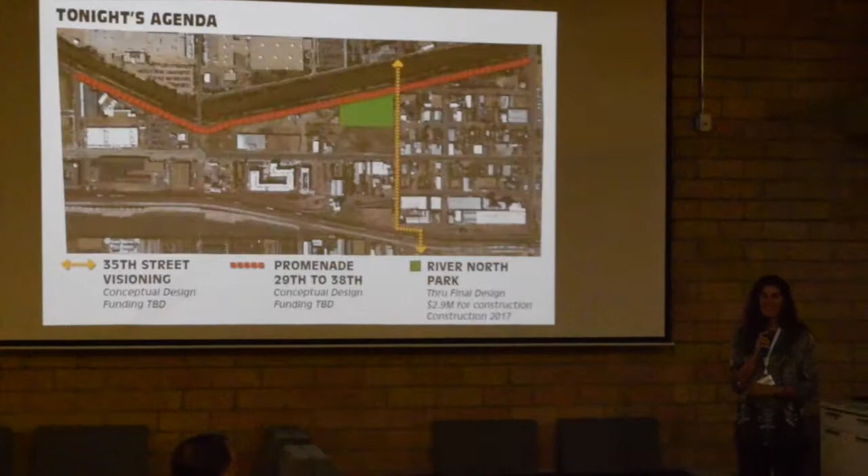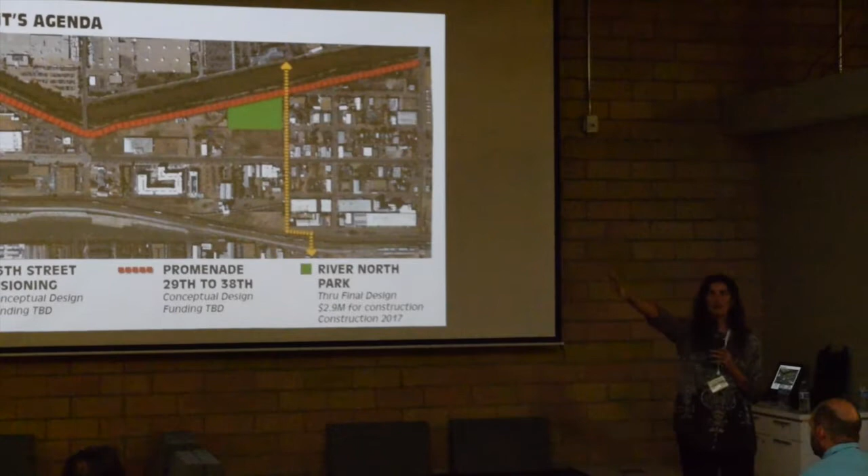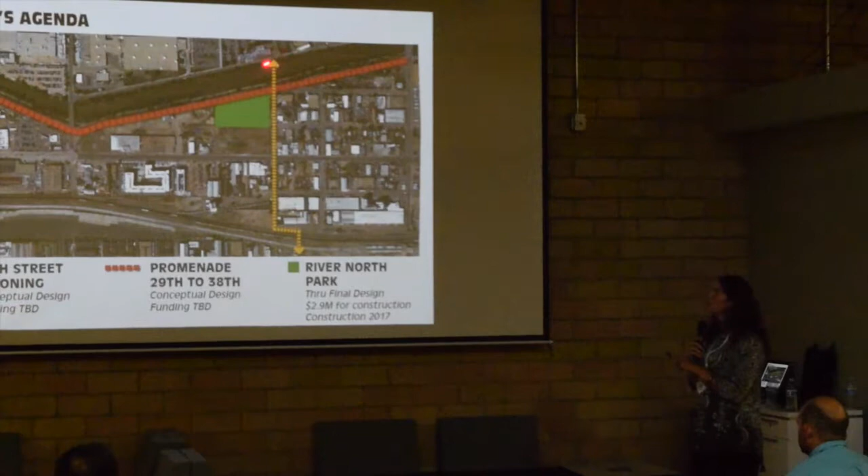So we're going to talk about 3 projects tonight, and I'm just going to orient you, then pass it over to Greg to talk about the first one. 35th Street Visioning is in conceptual design right now, and they're in the room over here. If you didn't get a chance to go in, they're looking at streetscape alternatives from the future bridge going over RTD to the future bridge that'll go over the South Platte River, plus parking alternatives and a promenade along 35th Street. They have a lot of ideas, so go check out what they're doing over there.

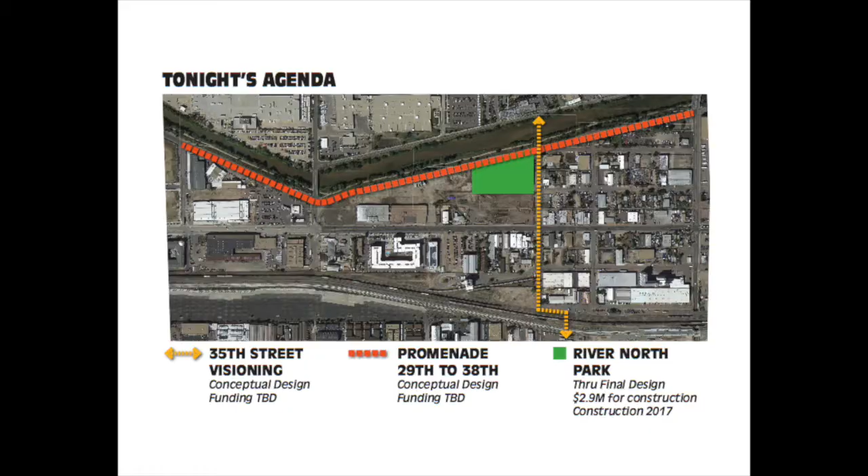The promenade is another project we'll be talking about tonight. It's in conceptual design, running from 29th to 38th along Arkins Court. Right now that's a vehicle street. In the future it'll remain a vehicle street from 29th to 32nd, and then be repurposed to a pedestrian promenade from 32nd to 38th. Greg's going to talk about that in just a second.

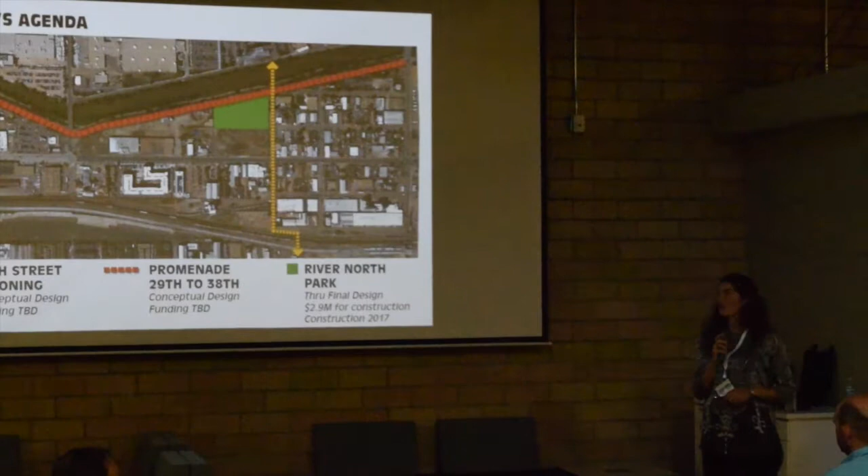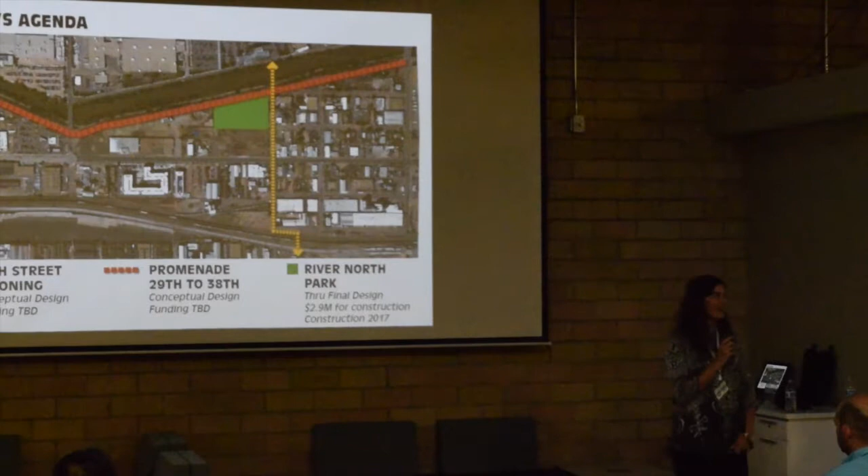And then we'll wrap it up with talking about River North Park. The promenade concepts have been over here, and the River North Park concepts are on the other side of the room. I'll walk through the big ideas for the park concepts. That one has funding through construction, $2.9 million to get something built out there, so that's pretty exciting. I'll let Greg start off with the promenade.

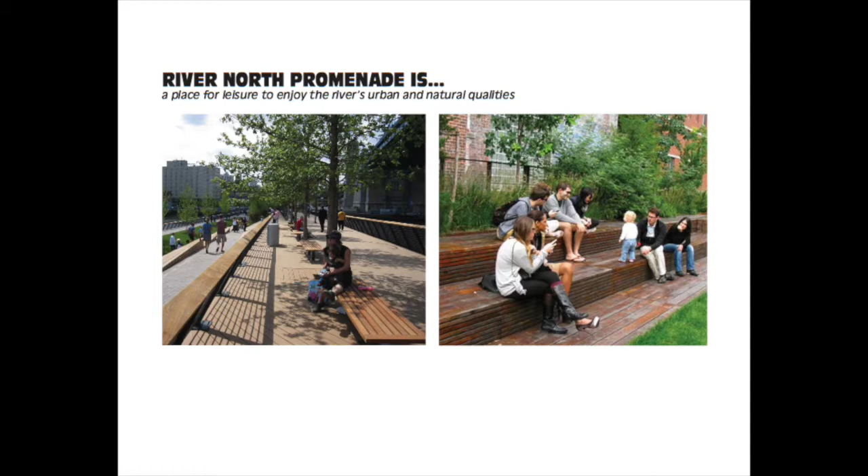Okay, thank you. I wanted to start by talking a little about how we've been thinking about what the promenade is. You've told us how to think about it through the first public meeting, through stakeholder interviews, and being out in the community. The promenade is a place for families. It's a place for kids to ride safely. It's a place for all ages, for people to stroll, a leisure place, a place to meet your neighbor, overlook the river, and really hang out. Finally, a place on the Platte River where you can actually eat, dine, and have a drink overlooking the promenade and the river.

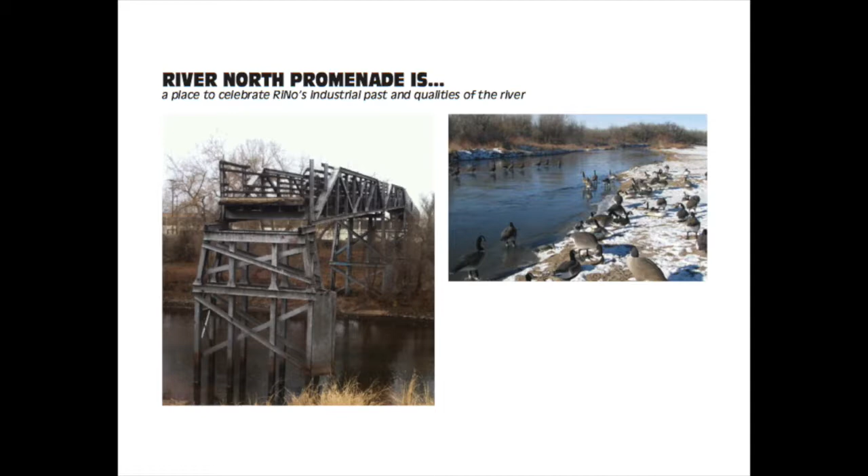It's also a place we've heard strongly from you should celebrate RiNo's industrial past, as well as the seasons and natural qualities of the river, like the tens of thousands of geese that flock here in the winter.

And lastly, it is a regional destination, and it's really to celebrate RiNo's art and culture. So, as Nicole mentioned, the scope area is from 29th to 38th.

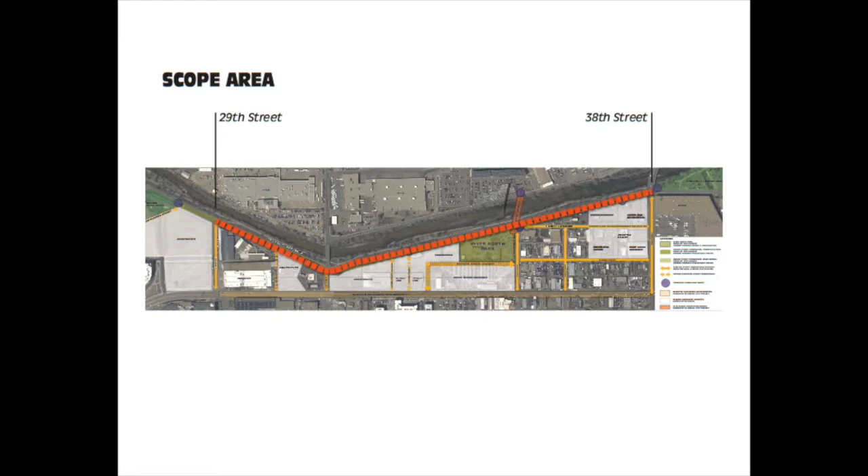The repurposing of Arkins. Next slide. So this diagram shows you connectivity and river access. And what you're seeing in yellow are

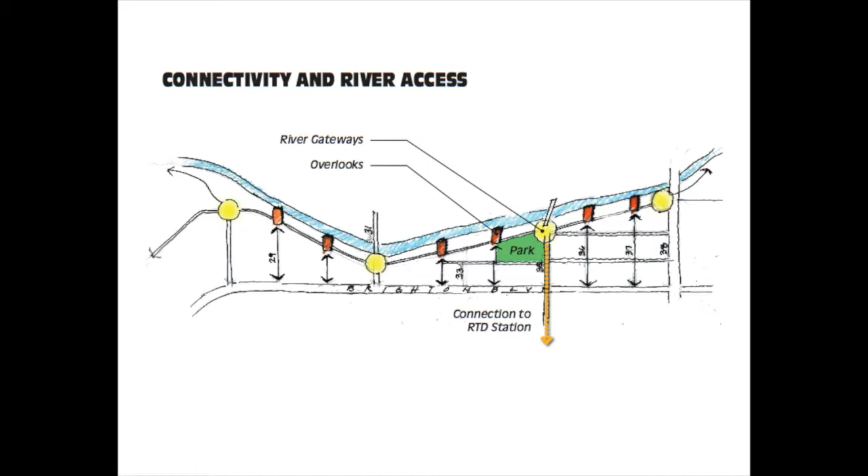connection nodes, if you will, where, as you know, RiNo is somewhat landlocked between the rails. These nodes are where RiNo has a broader reach. It's less than a mile both to Union Station into the Central Platte Valley from 28th, close proximity to Globeville Landing and Globeville National Western Stock Show, and 35th is an important node, as Nicole talked about, the 35th Promenade,

connecting to RTD, the greater region, as well as Curtis Park, Cole, Whittier neighborhoods. So there's good connection. 31st is a portal and gateway. There's talk of another future bridge that might potentially go over the tracks there. So that is how RiNo, or the promenade, is connected to the region.

But it's also connected locally within the neighborhood through the numbered streets. And even where there are not public streets going through, the developments in the area are making public access ways that will connect strongly from the neighborhood to the river.

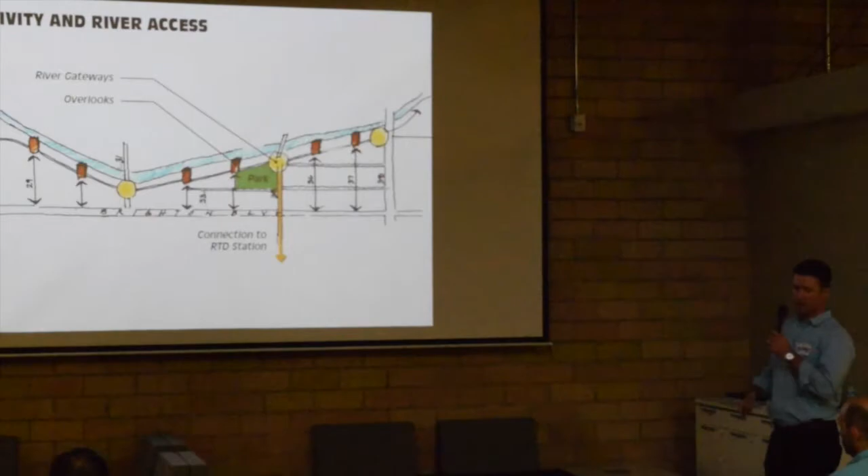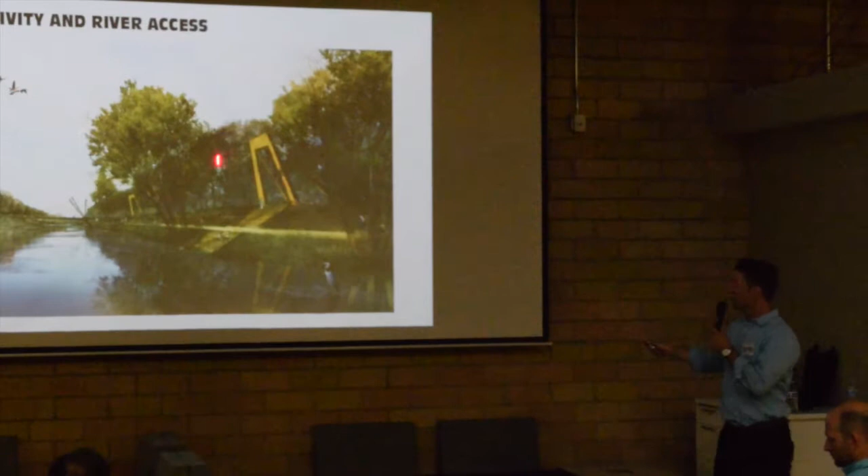So at each one of these nodes, next slide, we're planning these, this is a concept for these visual gateways to the river. So when you're on Brighton Boulevard and you're looking down the hill toward the river, you're going to see these. When you're on the river in a canoe or you're on the path, you see these up along, connecting the river path with the river promenade.

At our last meeting, there were a lot of concerns about vagrancy and homelessness and crime and other things along the river. So these are not only visual gateways, but they're ways to get eyes both on the river and the river path, as well as to connect those between the path and the promenade.

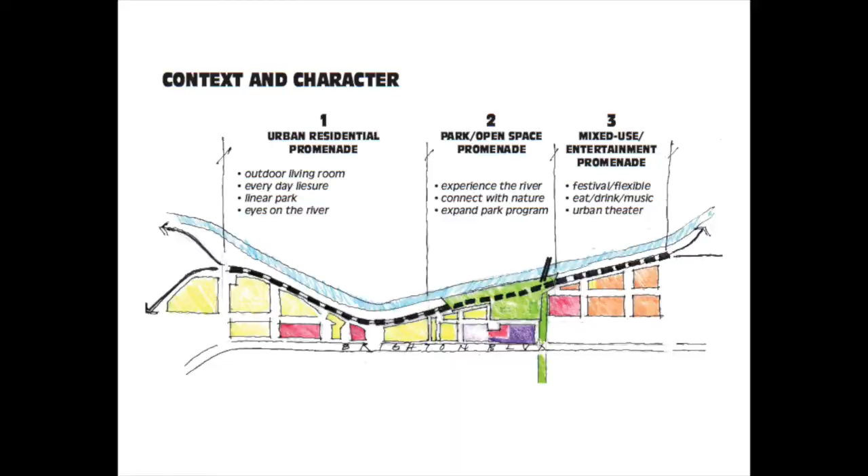Next slide. Also guiding our thinking is just the context. The changes that are happening in this neighborhood are rapid. Almost every property along Arkins is in the city now with redevelopment plans. So we're guided by what is the adjacent context to the promenade.

In this first reach, from roughly 28th to 32nd, there's a lot of residential development being proposed. So we see this as could be more of that outdoor residential living room for people. The park and open space promenade will benefit a lot from what we're talking about with River North Park and expanding park programs to the promenade.

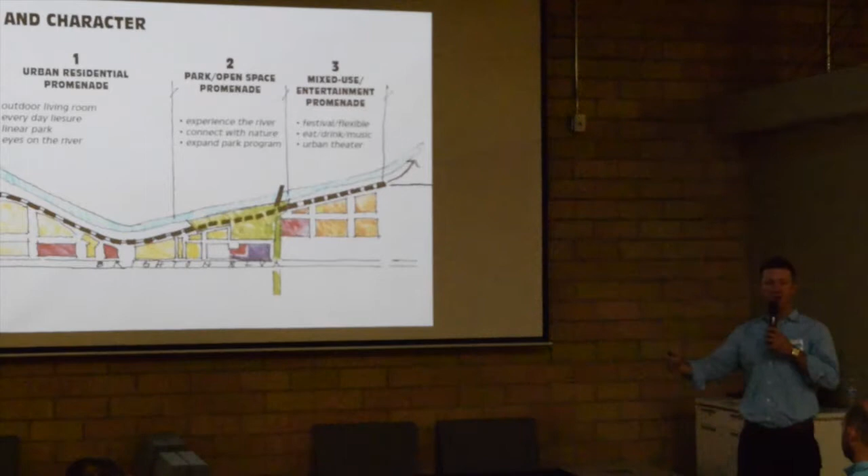And then the third reach, there's a lot of planning for both residential but a lot of mixed use and entertainment district in this area. So we feel like this character, or these uses, can really spill out onto the promenade and strengthen the relationship between the promenade and redevelopment.

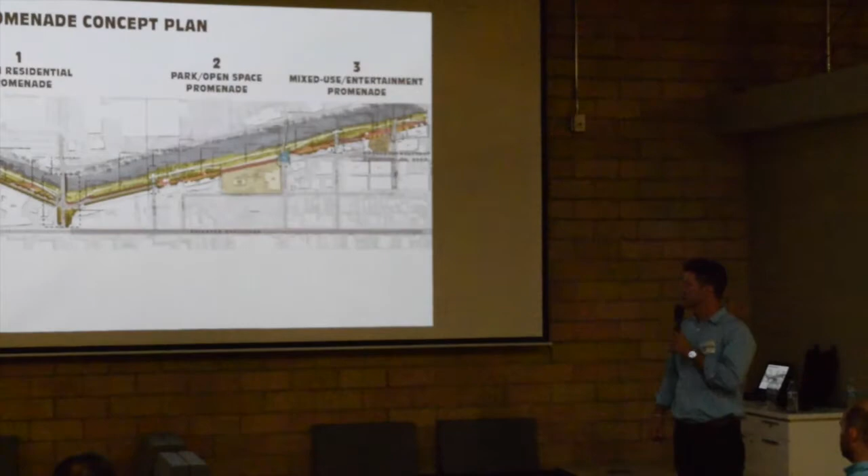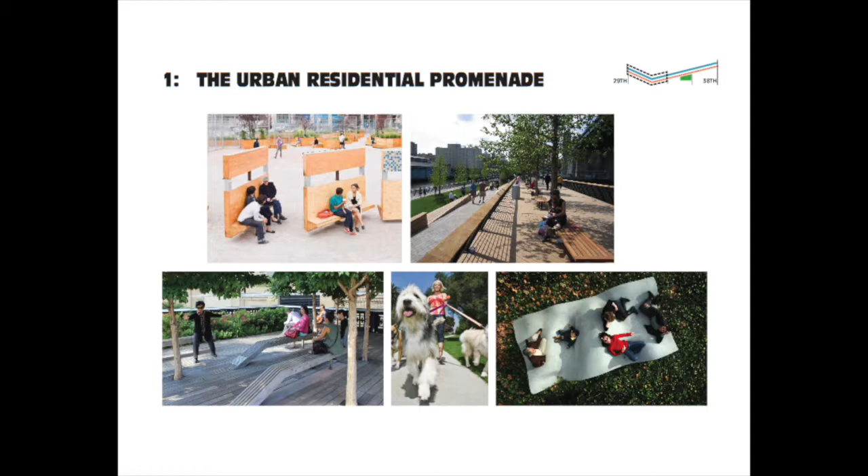Next slide. So this is the plan that you've seen over here. I'll just walk you through these three various areas, step by step. First, the urban residential promenade - this is the place where you meet your neighbors, you look out over the river, you relax, you walk your dog, you really just hang out.

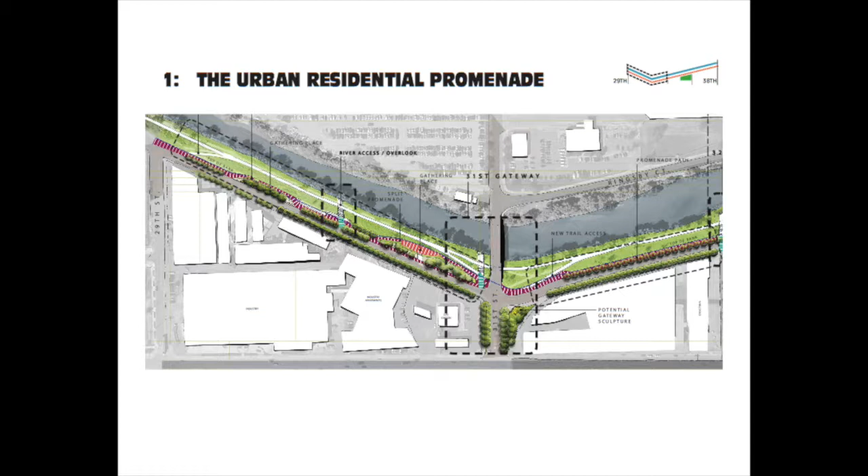Next slide. This is the plan for that reach, and the plan is very diagrammatic. So what you're seeing is the promenade is not this linear, tree-lined walkway. It really moves and engages the river and the street in different ways. As Nicole mentioned, there are 2 lanes of traffic and on-street parking.

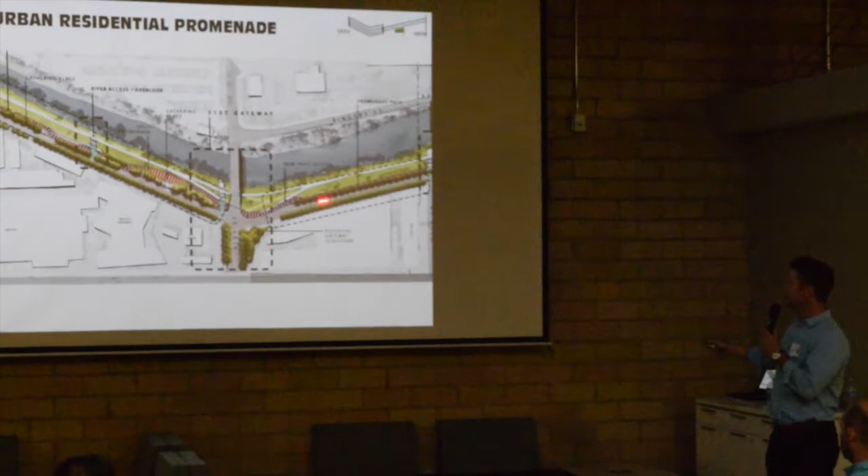One side of the street will have on-street parking from 28th to 32nd right here. So that will contain vehicular traffic where the promenade will be much on the edge. Next slide. These are cross sections, typical cross sections through this reach.

The top of bank, before it falls down to the river, is generally about 20 feet on average. And so one concept here is that the promenade can be both this, but it can be like this as well, where we add stair steps and a river theater so that the promenade can be below the street level while also creating groves of trees and places to hang out at the sidewalk level.

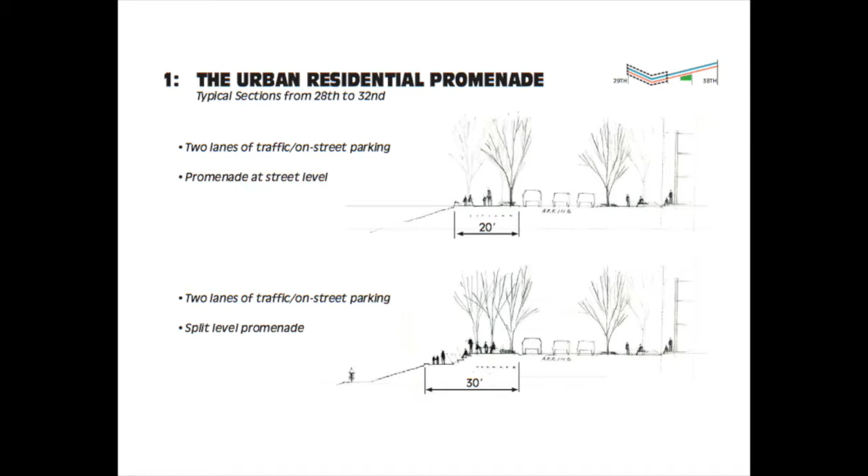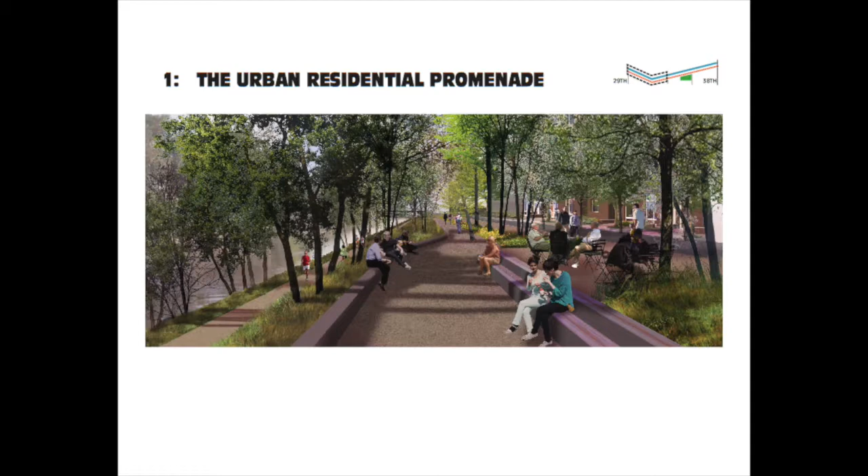It's a good time for that. As you saw, the vegetation wasn't on much of a rhythm with the trees. We're thinking a lot about urban groves and using vegetation that is of the river—cottonwood trees, alders, serviceberry, those things you'd find in a natural floodplain, using that in very urban ways, with native understories of both floodplain grasses and perennials.

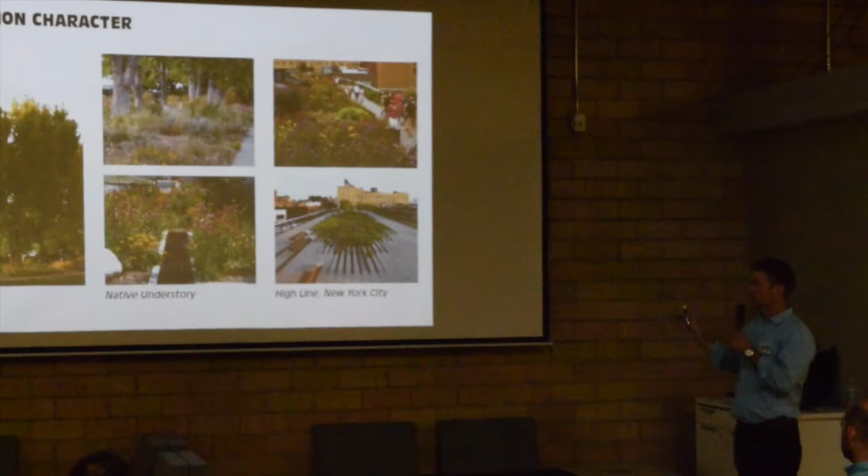And these are for the Denver region. This is the High Line in New York as an example, which I think you guys have seen a lot of in the last meeting. But the idea here is I think what people love so much is not only the use, but the layering of vegetation and how natural and urban forms come together and are woven together in really interesting ways. So the idea is to use this palette much like happens on the High Line.

Next slide. Moving on to the Park and Open Space Promenade, roughly between 32nd and 35th. This is where the promenade really opens up onto the park and supports the park programming. Nicole will talk about the maker spaces, the labs, and other things. So the promenade should have a great relationship with those future park uses.

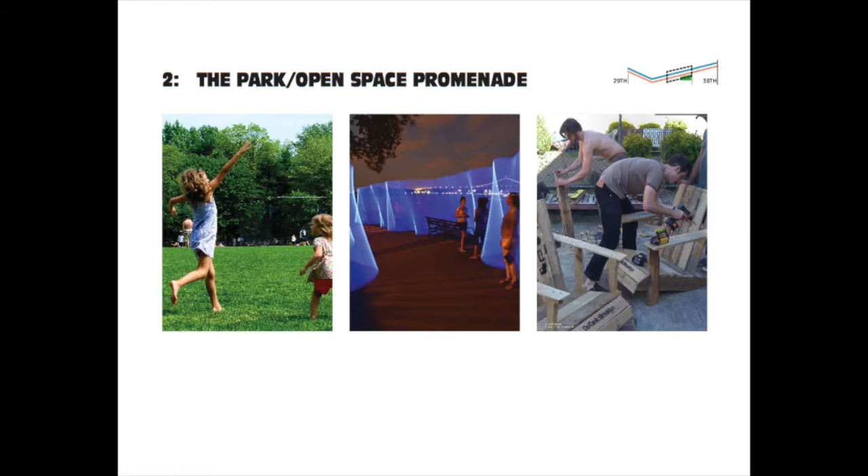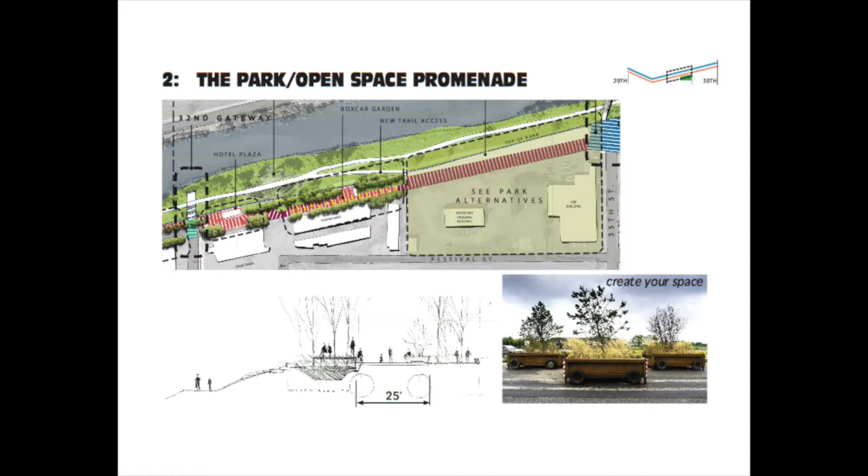This is left blank here on purpose—this is the park, sorry. Because when Nicole goes through her 3 alternatives, you'll see 3 different approaches to the promenade in that reach.

So again, what you're seeing here is a small section. The other challenge we have is there are 2 major sewer utilities that cannot be moved as part of this project, and they go under Arkins. It's likely that the utility will make us keep that area paved. So what you're seeing here, generally, is about 25 to 30 feet wide.

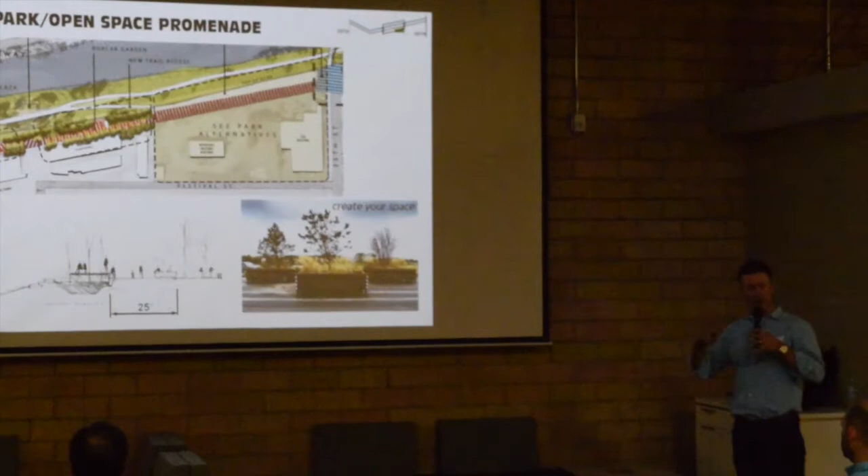So there's a concept here that maybe what we're calling the boxcar garden—using these movable crates, if you will, that are vegetation or benches, and you create your own space along that path. One purpose is to deter fast bike use going through, but also to give people that variety.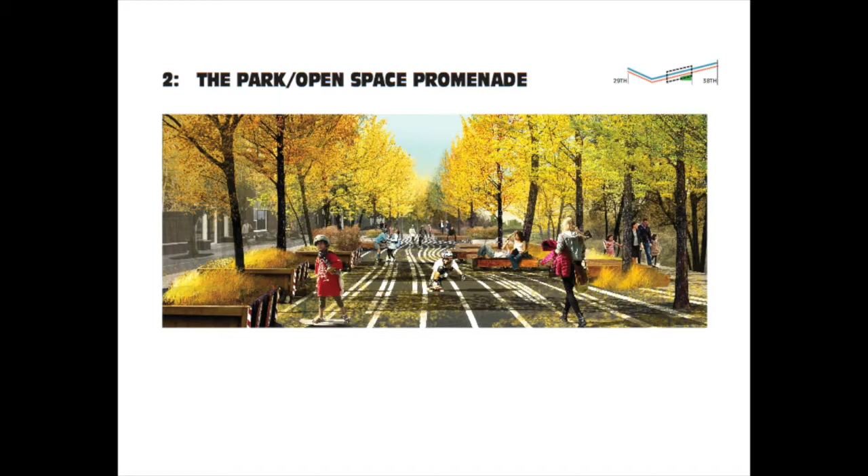Next slide. The last section here is the mixed-use entertainment promenade. Again, you're seeing a more festival-like atmosphere, where the redevelopment area could spill out onto the promenade—a great opportunity to celebrate the rich art and culture of the neighborhood.

So again, you're seeing generally in this red and purple hatch the rhythm of the promenade, if you will. It's opportunistic in the way that in some areas it expands out, because that's where the top of bank really expands out. So the promenade in this section can be anywhere from 30 feet wide to 60 feet wide, so we can start creating little groves and enclaves, places to sit out and overlook the river, pockets that can be flexible for use, as well as opportunities to create cafe zones along the river.

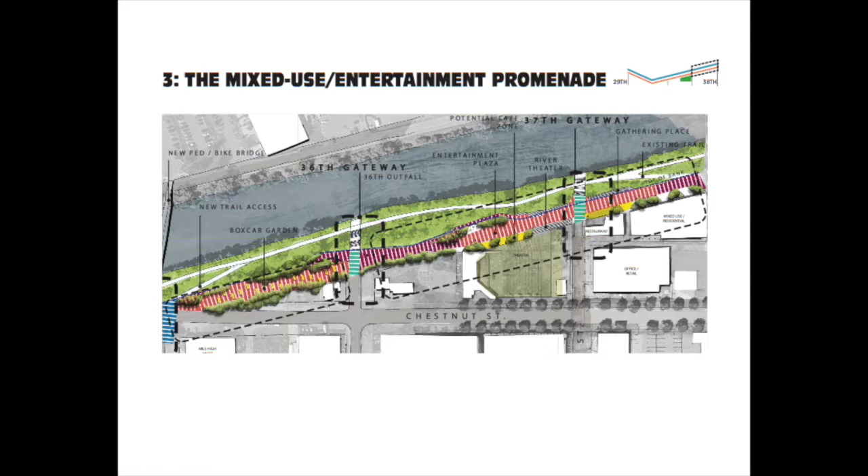Next section—this is a little washed out, but this is an example of if a redevelopment project were here with a cafe. There might be a designated cafe zone, but still plenty of public access throughout the promenade.

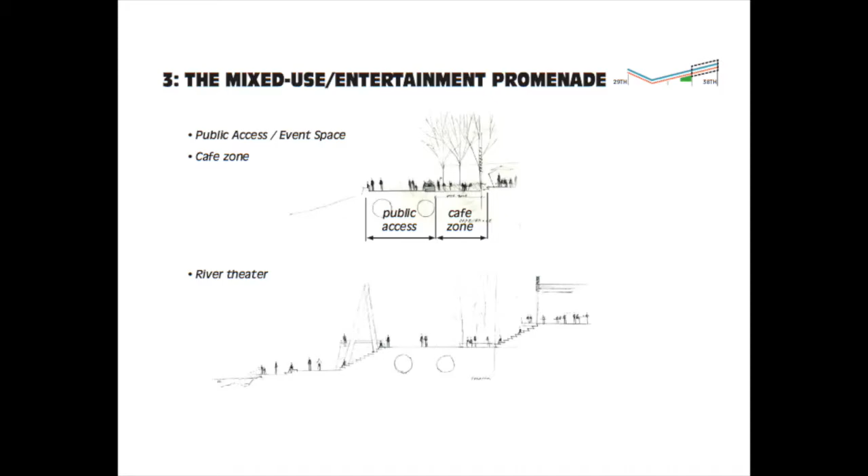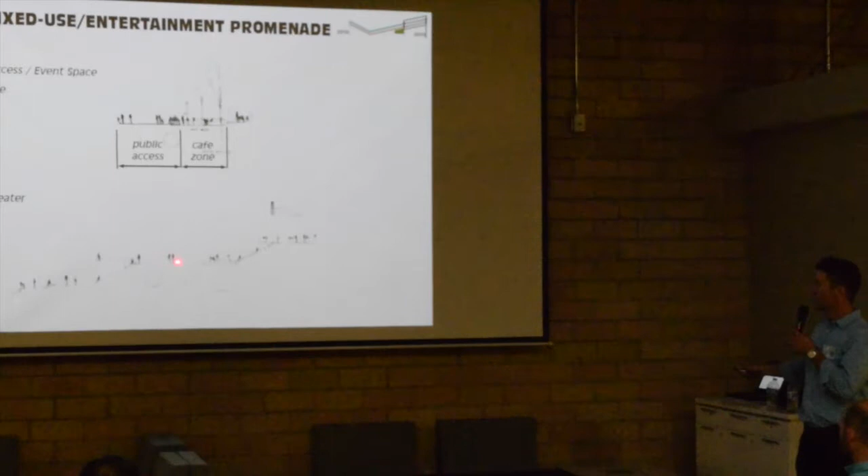And then there are also plans for an amphitheater and an entertainment district here. Maybe there's a partnership that builds a promenade theater, if you will—a public-private partnership that could create this great theater overlooking the promenade, with steps that may go all the way down to the river itself.

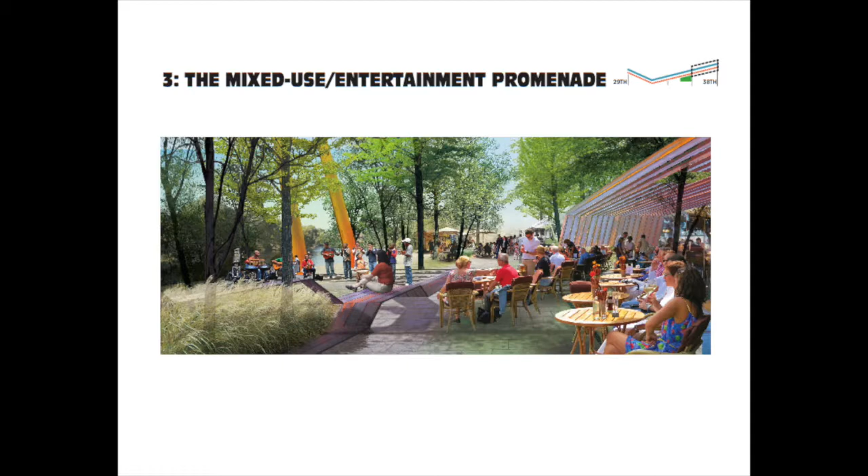This is a sketch of something in that area where you're seeing, again, a sidewalk cafe that could be private development—this might be the property line, overlooking the promenade, overlooking the river. In the background you're seeing one of the arched gateways, really creating that strong relationship between public and private—an opportunity to do something that doesn't exist in Denver along the Platte. So I think this is a great opportunity, and some of those similar partnership ideas are something Nicole's going to touch on in the park as well.

So just quickly, what we want from you after this is: what do you like here? What do you feel strongly about? What don't you like? What have we missed? The accuracy of the plans as you know them—there are developers in the room as well. We're just really looking for some good guidance here, because I know this is the first time we're seeing this part.

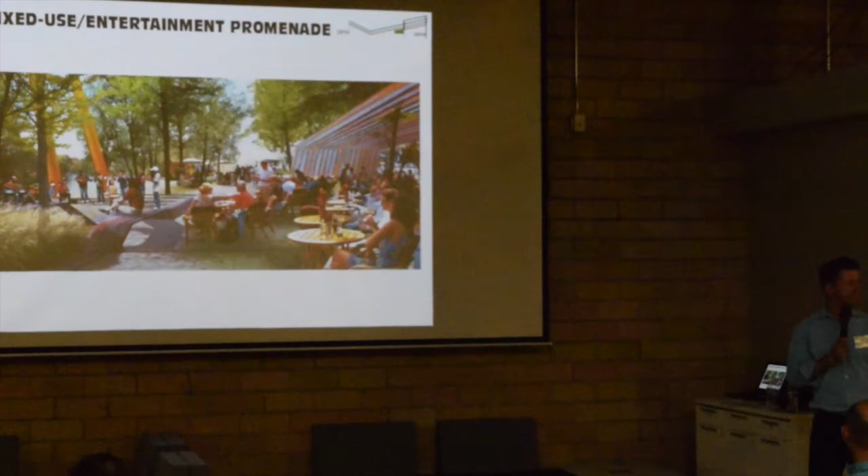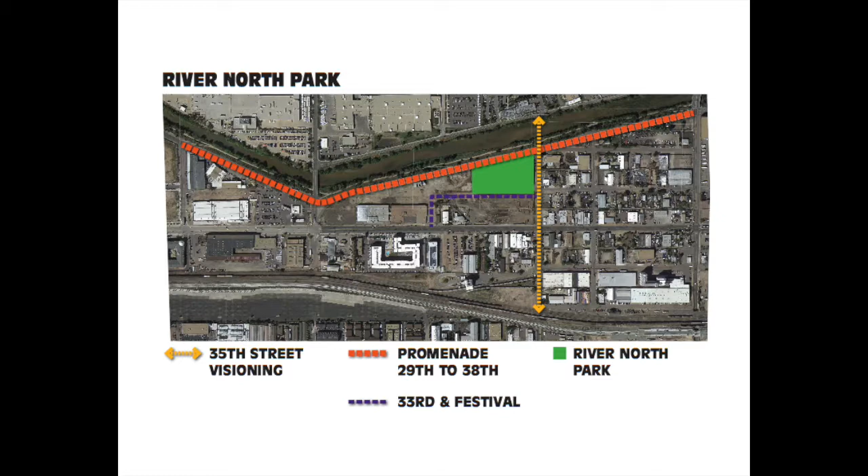So we're going to talk about the park now, and it seems like everybody knows where that is. It's along the South Platte River, 35th. This is Festival Street, so that's not there right now, but that will be going in. It's right behind Great Divide in the park, and the city is working on that currently.

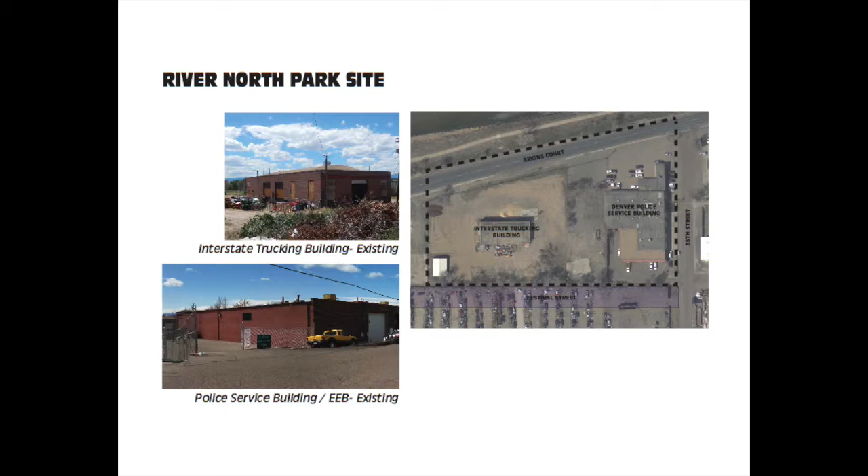So people were excited about those things. And then we did a survey and asked people at the last public meeting what it is that they want to see in the space. It was online, and we got around 200 responses, so that's pretty good too.

We had broken it up at that point into the sandbox, the stage, the lab, the river, and people wanted flexible spaces. The indoor maker space came up, temporary and permanent art installations, which is a different thing than you see in a lot of parks. Community agriculture came up, and we're doing a survey tonight. We have hard copies and online to dive a little deeper into exactly what the neighborhood is thinking for that, and I'll talk about that as we go into some of the concepts as well.

And creative play, so not your catalog playground equipment, but how can it be more exciting and different and artistic. And I would say another huge thing was the South Platte River and having that river aesthetic into the park. So you'll see all of the same program in the concepts, but they're interpreted differently.

So the first one is what we're calling the River Lawn. This one keeps the interstate trucking building as kind of the neighborhood hub of the park, the heart of the park, with performance areas around it. And it has kind of your traditional sloping lawn down to the river.

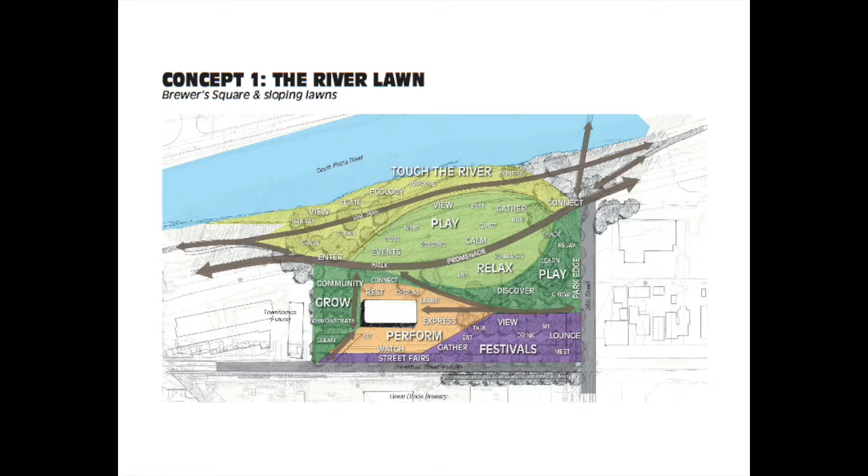So this is what that concept looks like. Brewer Square sticking out into the park, and this discovery garden that might have trees and different play structures you can walk through. It has what we're calling urban agriculture, which could be a community garden or an orchard where you could go and pick fruit and bring it home. So that's something that's on the survey—what does community agriculture mean in a park space?

I think the other thing this has is, when the sloping lawn comes down, it has an overlook—maybe a soft surface path that brings you out to overlook the river, and point bars that create riparian edges down at the water that you can actually walk down. They're kind of sloped rock jetties that you could get down and touch the water's edge.

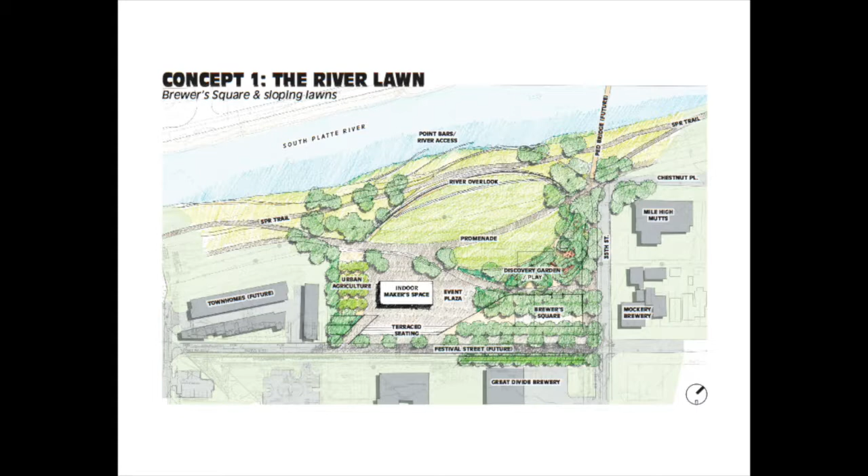The next slide shows a view from Brewer's Square, at 35th and Festival corner looking over the park. You see the interstate building in the background, and there's a little wall here that creates that overlook edge.

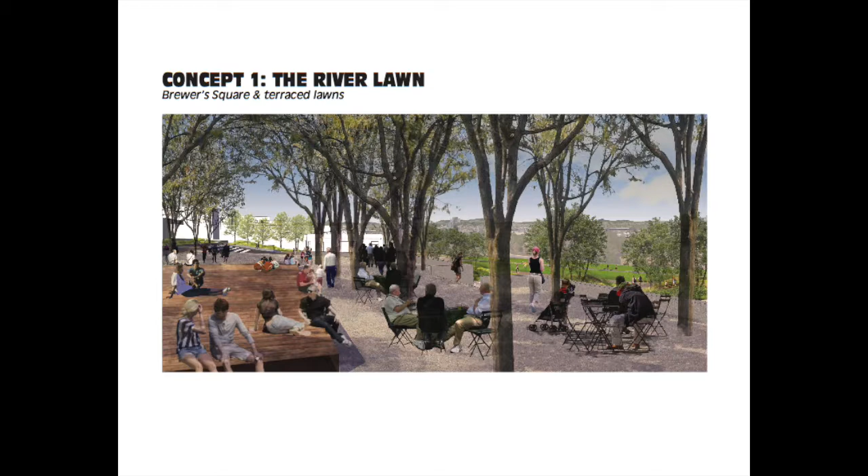The next concept is different than the first one. This one starts to be a little more urban, a little more natural, combining those things. It still has the festival edge, but more of a promenade—a 20-foot edge that extends off of the street, making a connection to the interstate building that we're keeping as the indoor makerspace. This one has a bridge to make that gap of grade.

You can walk from the festival street and have a performance area on this bridge, which extends into the building and would have steps down into the building for the makerspace. It kind of creates a theater inside that building, with a performance area happening around it.

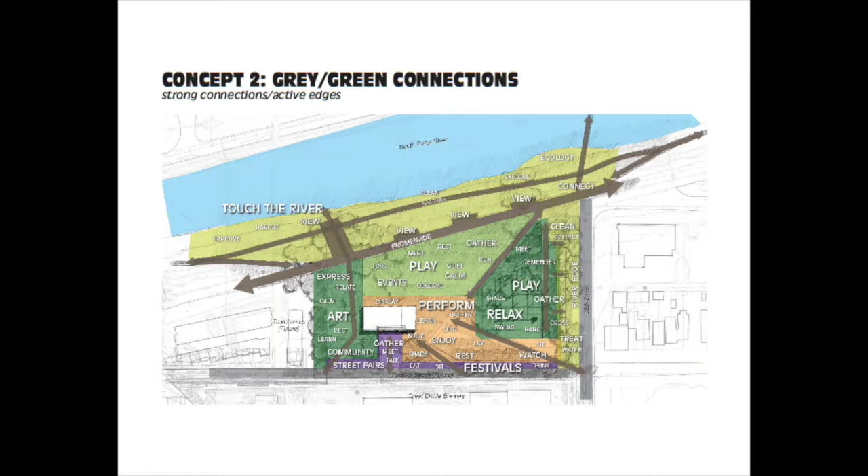For the interstate, or the EEB building—the police building—it removes it but keeps the center portion. If you click to the next slide, you can see that center portion: the trusses and beams of the roof are kept, and you can hang swings down from it, making it a place you can play in, around, and throughout.

It could also serve as a plaza with an amphitheater edge, so you have terrace seating looking into that space, or a sloped lawn looking into that space.

It starts to bring nature into the park through collecting stormwater from 35th, creating this grove of trees. Whether it's stormwater or a landscape edge, there are walkways through that space—floating walkways—and the trees are coming up through it and through the structure of the building.

The event plaza works around the maker's space, with terraced edges walking down to the river, to a more formalized edge, similar to what Greg showed of the steps down to the river.

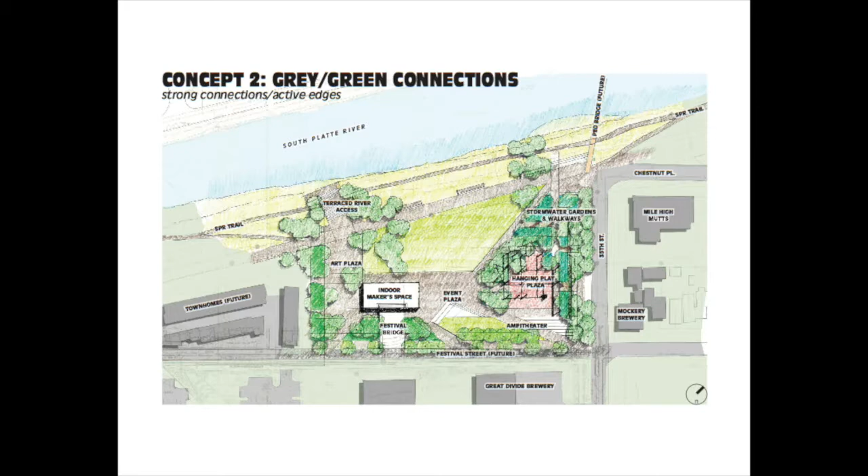If you go back, I'll show—this image is around here on 35th, looking into the stormwater area and the structure.

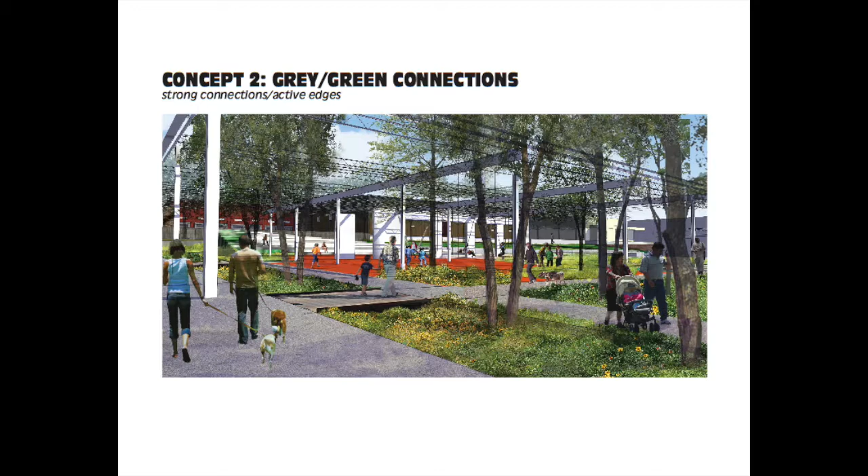If you go up to the board, you can see the kids swinging in the background here, and these floating walkways that bring you over the landscape, and the stormwater coming from...

The third one goes a little further in the idea of bringing nature and the industrial past into the site, and how nature starts eroding the buildings. For this one, the interstate trucking building...

The landscape is actually coming through the building, and the roof structure on the back stays, while the front of the building starts to deconstruct, like the center did over there.

It's kind of what we've been calling RiNo's version of the Cheeseman Park Pavilion. If you think of a park pavilion, this one's that industrial building, with the idea of the past still there—we'll show some images of that.

From the Festival Edge, it creates a terraced play area that could be a slope coming down, with at-grade slides you could climb up and slide down.

It keeps the... why am I getting these names confused? The EEB building, the police building—it keeps two of them.

When that building was constructed, it was built in 3 phases, which makes it pretty easy to deconstruct in different ways. So it keeps the garage and the garage doors on the side—there are actually, I believe, garage doors on the inside of that building that would face this Makers Plaza—and it keeps the overhead structure like the last one did, and then you have another conditioned building.

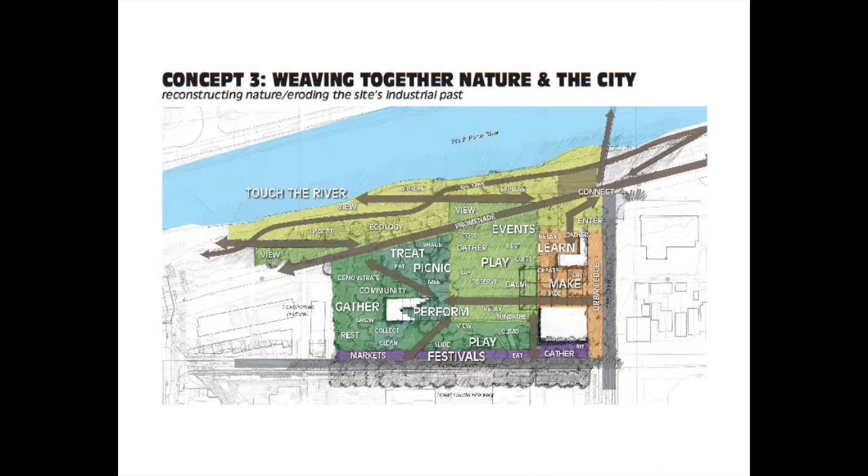If you go to the next slide, for access from 35th it creates this prominent entry through Makers Plaza that has eyes on the park from the windows on both sides of these buildings, and aligns you directly with the pavilion space.

It has stormwater that could be collected from 35th and Festival coming down this edge, and it's this green ribbon coming through the park and eroding the building.

And if you rented this pavilion, you could have a little garden terrace on the back side that is a little bit more private than the rest of the park, but you can still use the whole space. From a river standpoint, this one has ramps down that bring you down to the water's edge, and it creates terraces up above that look down towards downtown, down the river, so you can see downtown from the park.

So the first perspective you're going to see is in Maker's Plaza. This is one of the buildings that could be a maker space, could be an art gallery, with the idea of play underneath it. The rafters or beams up above could provide shade that people could open and close themselves, creating different light on the ground plane that could change. The trees growing up through that structure give this 'what came first, the buildings or nature' idea, and you really see that in the next one.

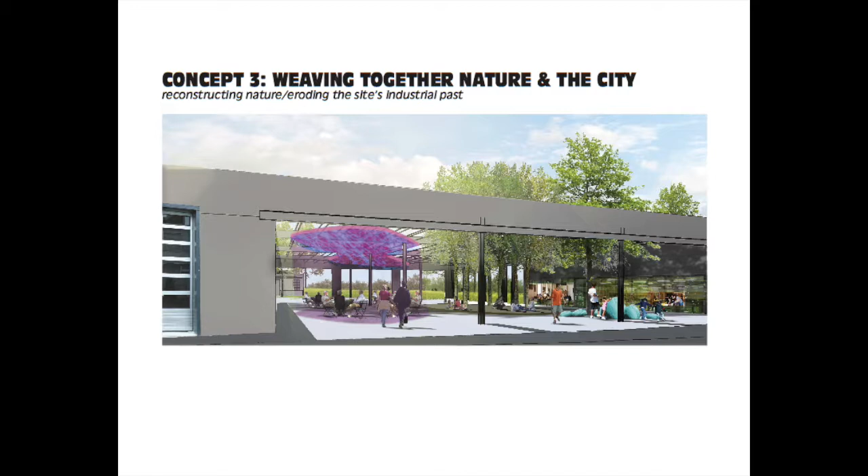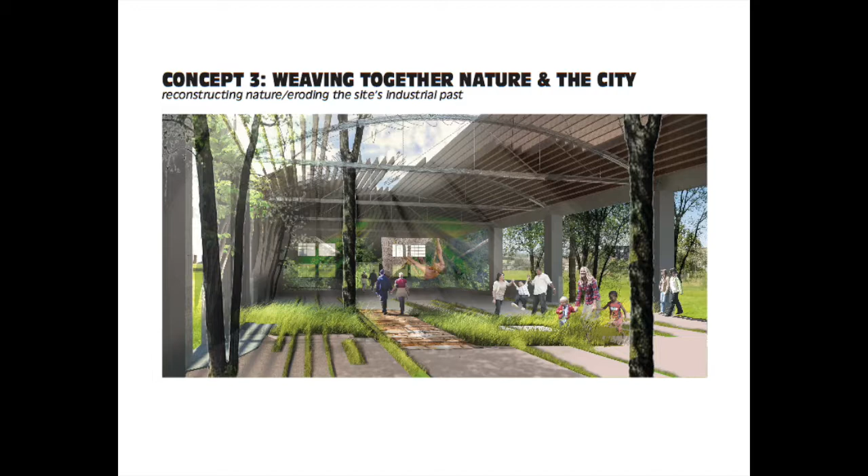The next slide is the interstate building pavilion. The green ribbon coming through it, the covered space in the back, and using art, video projection of art and ecology to create light in the park that could change over time, creating another safety level to the park. So those are the three concepts.

We've gone out on the street and asked some neighborhoods, and gone to a school who graciously came tonight to see the presentation, asking people what they were thinking. What we really want to hear tonight is what you guys are thinking. So we have the survey, we have notes you can write ideas down on, what concepts you like, what you don't like about them. We want to hear it all.

Because what we're trying to do is get to a preferred concept for a December 3rd meeting. We'll have one more public meeting where we want to come back with one big idea for the park. So get your feedback and share it with your friends, let other people know to go online. The survey will be online tomorrow, we'll get the boards up, and you can share it all. Write ideas on the promenade, go back over to 35th Street and give feedback, so we can get back together for the December 3rd meeting.

And we'll do questions for a little bit. I know we talked for a long time, so I want to get feedback, but if there's specific informational questions or things you want to make sure everybody heard, I'll do a few.

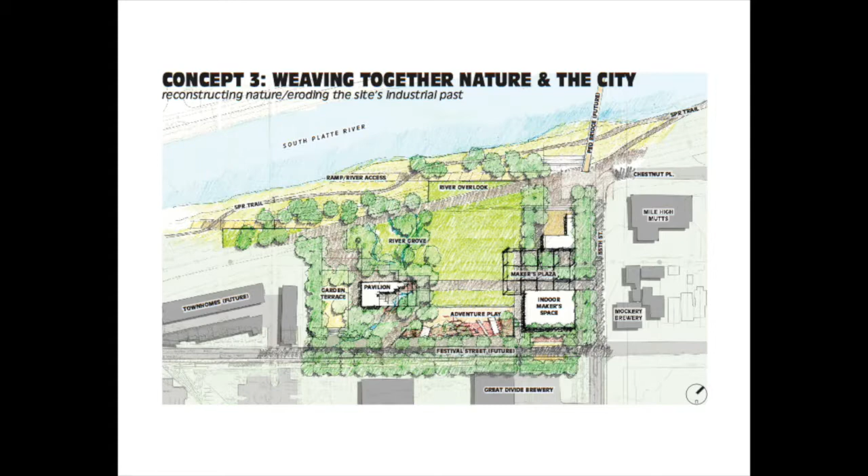But you don't have to like one concept. You can like things in different concepts, and that's what the preferred will then become - a mesh of everybody's preferences, hopefully. I would love it if there was one that was perfect, but there won't be. I don't even think I would love that. We want to hear different feedback and what you like about each one. Other questions?